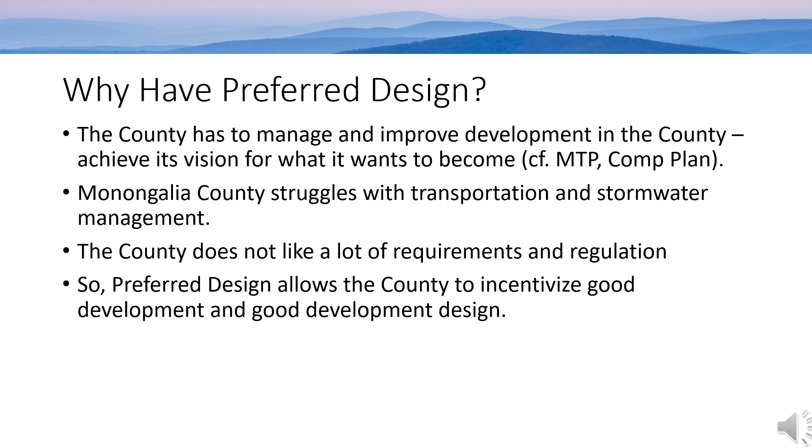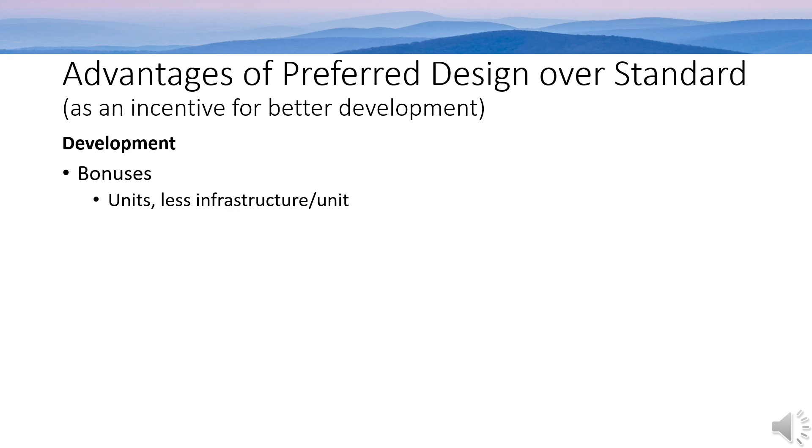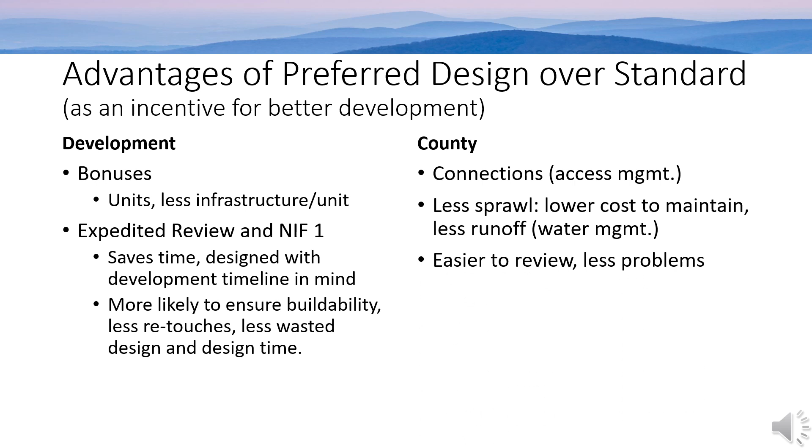As a reminder of the incentives to encourage this better, or what we call preferred design, there are advantages for both developers and the county. For developers, they are offered more units and less required infrastructure per unit. There are also large time advantages for the expedited review offered for subdivisions that meet preferred design, as well as being easier to approve with less rework, as they would be using designs and templates that the MCPC would be familiar with. For the county, we'd get better, safer connected roads, less sprawl and its associated costs, easier reviews and review time. The actual buildings would be better due to wiser use of land.

Where does preferred design come into play? Four principal areas apply: global considerations, site design, roadway design, and the transportation network in general. We will address each of these areas briefly.

Global considerations include integrating regional transportation improvements, those described in the Metropolitan Transportation Plan, or MTP, and land management, as described in the Comprehensive or Comp Plan. Though this mostly affects large developments in key areas, it can actually be a benefit to all developments. Such future plans are required by state law to be put in when possible, but it is expensive to do so after the fact. Preferred design enables the county to better dialogue with the development to ensure a development can take full advantage of these future amenities for the least cost to both the development and the county.

Site design. Sites should be designed to prevent stormwater and transportation issues. When laying out a development, a design should avoid steep slopes and floodplains and manage them scientifically when it cannot avoid them. There are also advantages and bonuses for developers when they use better designs and technologies in site management and parking lot design.

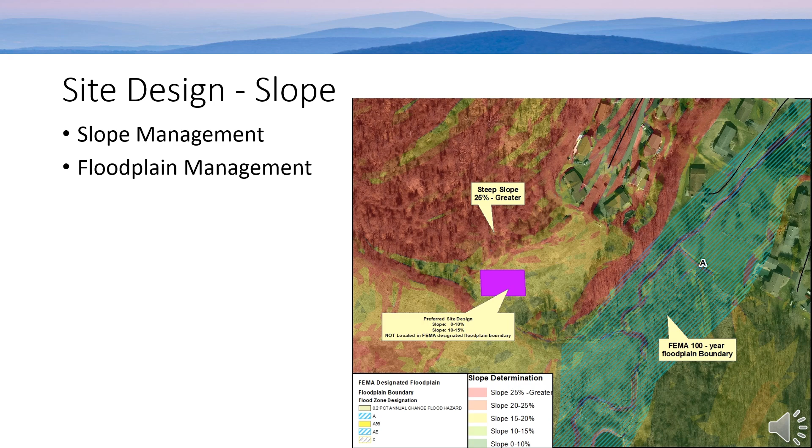Furthermore, sites should preserve the natural condition of a site where possible, rather than clear-cut. Nature had already designed the site to deal with its situation, so any change from that natural state should be avoided when possible, especially in parts of the site that do not need to be altered from the natural condition. With local topography and rainfall, it makes sense to only develop land that is conducive to development and leave the rest. Better for development, better for the county. Bonuses are provided as a result.

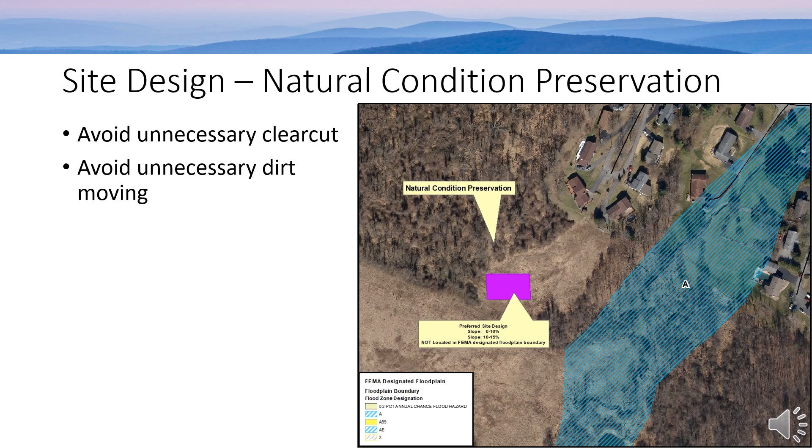Parking lots are often one of the most intensive elements for disturbing the natural landscape, and so often are mostly empty, dumping extra storm water and making cars drive more for no advantage to the site or the county. We'd like to avoid this where possible.

Parking lot design and technologies have advanced greatly in recent years. As a result, the county gives bonuses for taking advantage of this better design and provides templates that show how to take full advantage of these bonuses. They also show how to take advantage of advances in surface technologies that help avoid expensive engineering solutions.

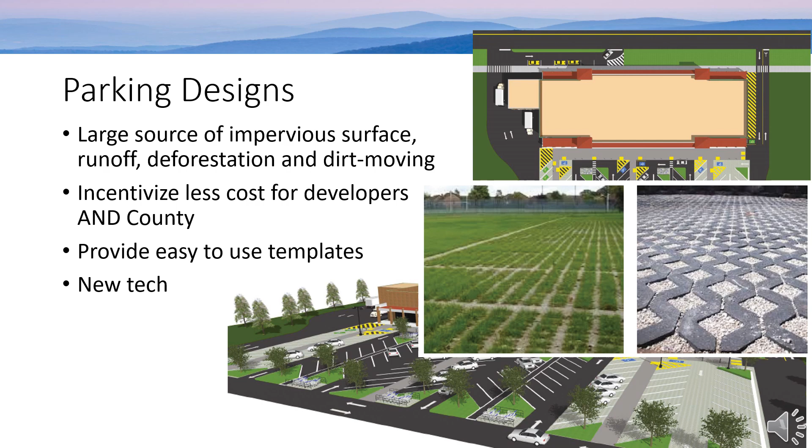Another aspect, in between site design and regional impact, is roadway design. With the natural steep slopes of the county, roadways are also often steep, creating unsafe travel and high-speed water coming off the road. Furthermore, developments often make roads that are wider than necessary, leading to the same effect. Better design generally saves a development money as well as redressing these issues.

Thus, preferred design helps address roadway slope and width issues, minimizing dirt and slope work necessary, creating safer and friendlier neighborhood designs. To reward such designs, the county offers housing and other bonuses to developments that pursue these designs.

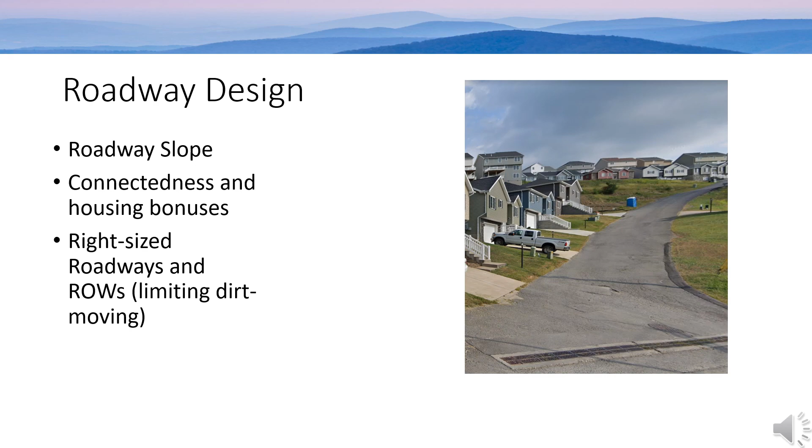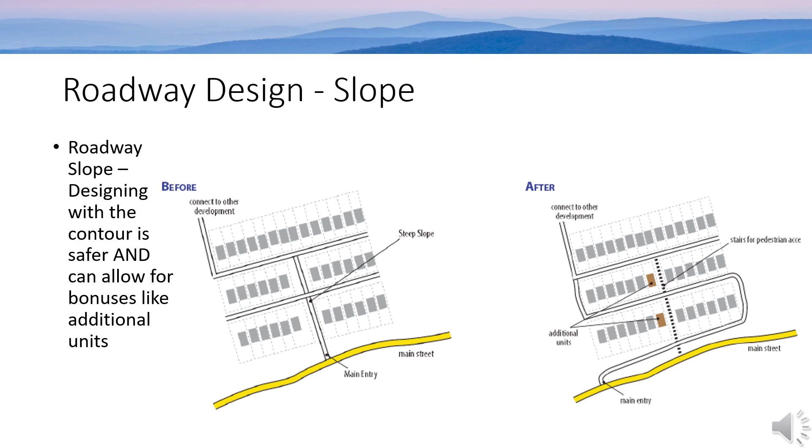Furthermore, when development designs only one way in and out of a development, it costs the residents more money, more delay, and risk in emergency situations, and it leads to much more traffic by forcing people to drive the long way around and channeling more traffic onto roads, leading to bottlenecks and unsafe driving. Consequently, the county rewards developments with more favorable housing bonuses and less expensive roadways, which will be shown in the next slide.

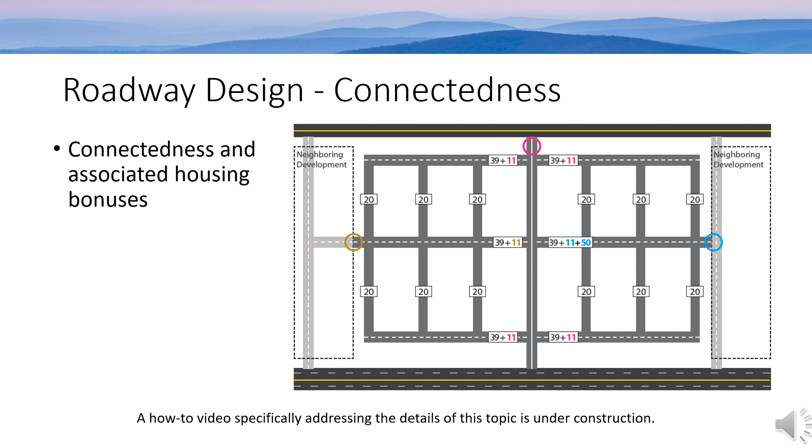If a development does a better job connecting roadways, then there is less traffic on any given roadway, as well as slower speeds on residential roads. Smaller speeds allow the county to reduce roadway widths, front yard setbacks, and the length of roads needed to serve housing. This also allows strategic reserving of right-of-way. This reduces the need for developers to move dirt without need or only when the need arises.

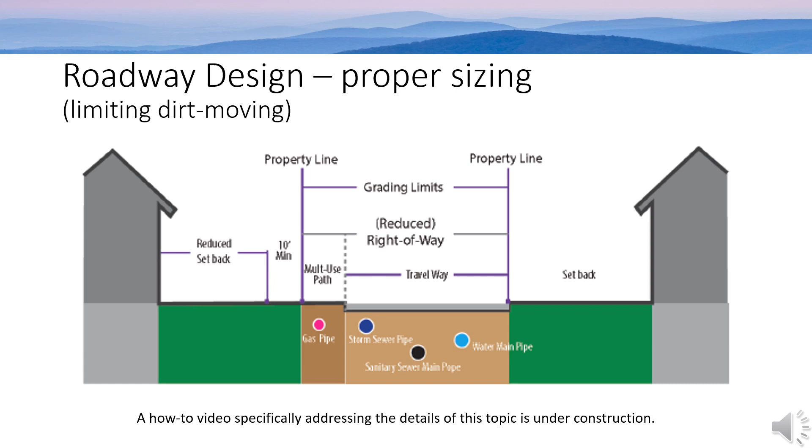Finally, the transportation network itself is heavily impacted by development design. As mentioned earlier, designing a development with only one way in and one way out makes residents have to travel a long way around to get anywhere, blocks up certain roadways with congestion, and makes it more costly and less accessible to emergency services. Consequently, having a connected network for multiple modes of traffic, cars, pedestrians, and bicycles, allows many to have better, less costly, and safer access to the activities and destinations they want to get to. Developments can get bonuses for keeping these better designs in mind.

Furthermore, the county does not own any roadways themselves, and the state process takes a lot of time if they do take care of a given roadway, as they have roads all over the state to manage. Thus, a mechanism is provided to allow a local development to address a roadway issue near them more rapidly.